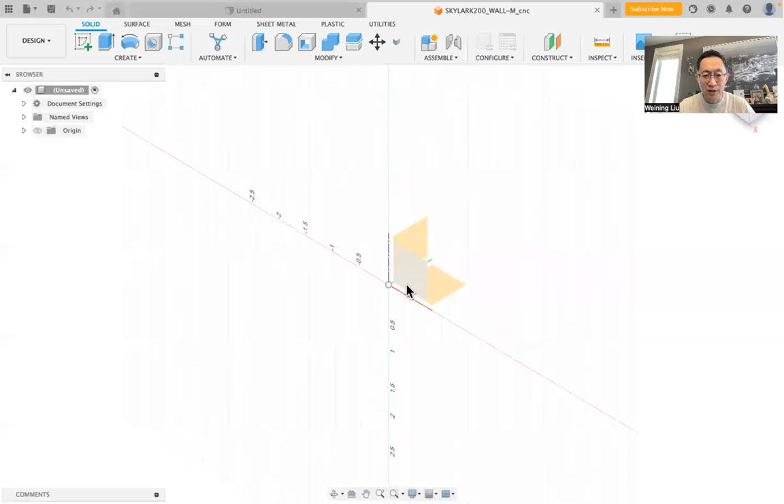So let's start from opening a file. I'm going to open a Skylark 200 wall CNC DXF file. Once I have this file open, we should see a couple of sketches. So here, if I expand this, there are multiple sketches, and the objective is to turn this into a 3D design.

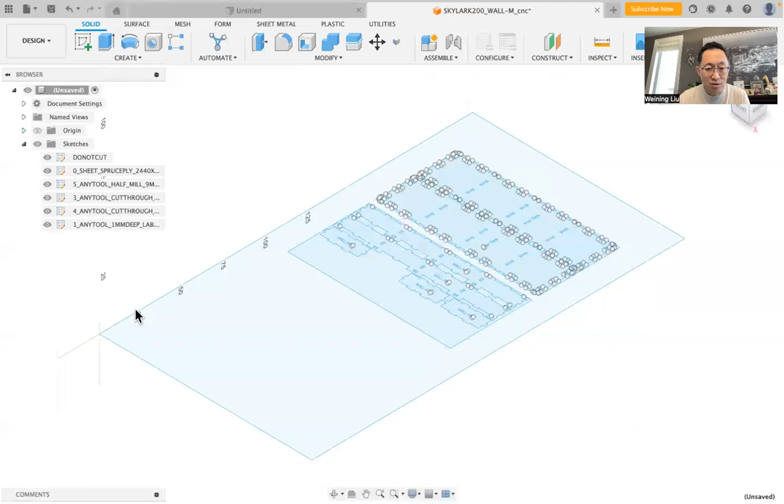Before I do that, there are a couple of things that are going to be useful. One is to capture the design history. So we have this nice design history here. And secondly, I want to change my units into millimeters. Okay. All right. So we're going to do this by order. So let's start from 0, and we hide everything else.

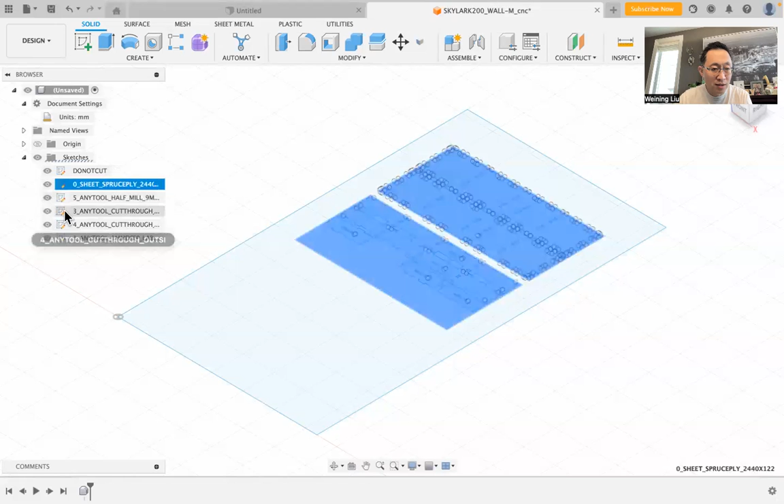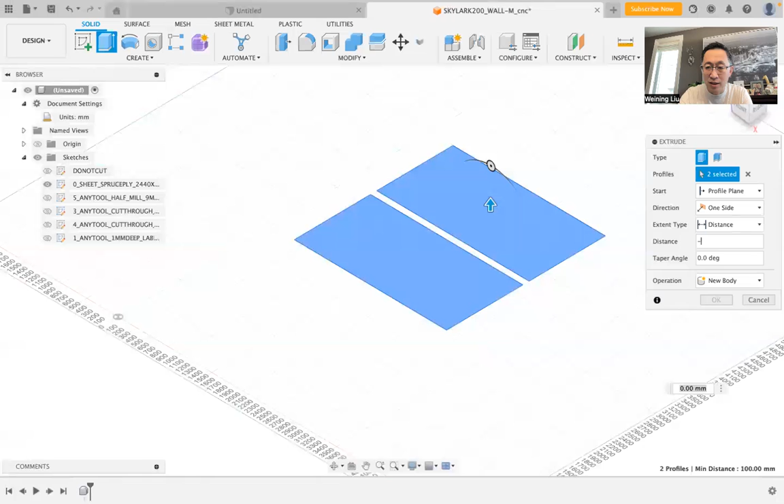Then we select these two. Then we hit the letter E on the keyboard. And you see two profiles selected and the distance. The distance here should be the thickness of your board, assuming you have an 18 millimeter plywood board. The trick here is to use -18 and create a new body from here.

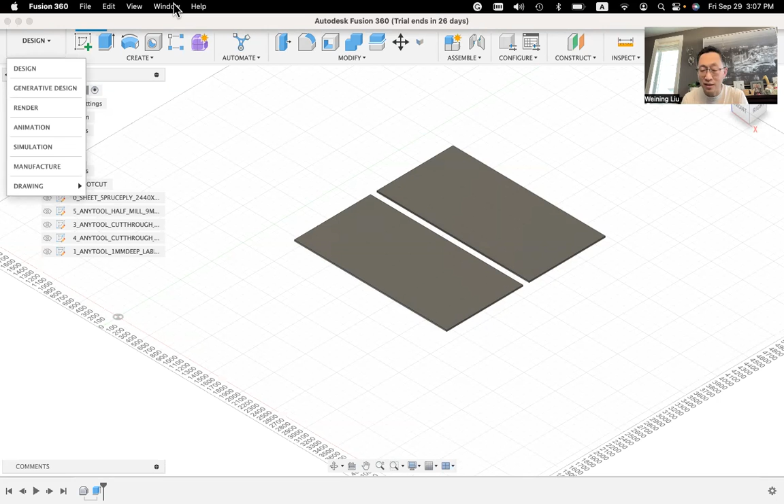The reason for -18 is if you were to do 18, by the time you switch to manufacture, you notice that you actually have to cut the board from the reverse side, like you see the two tabs from here. So by setting it to -18, it will resolve the problem. Okay, so we're done with 0. Next, we need to go to 1.

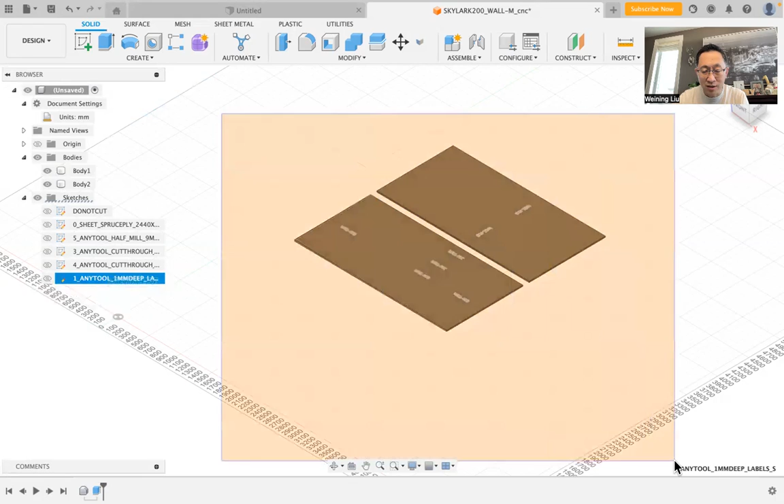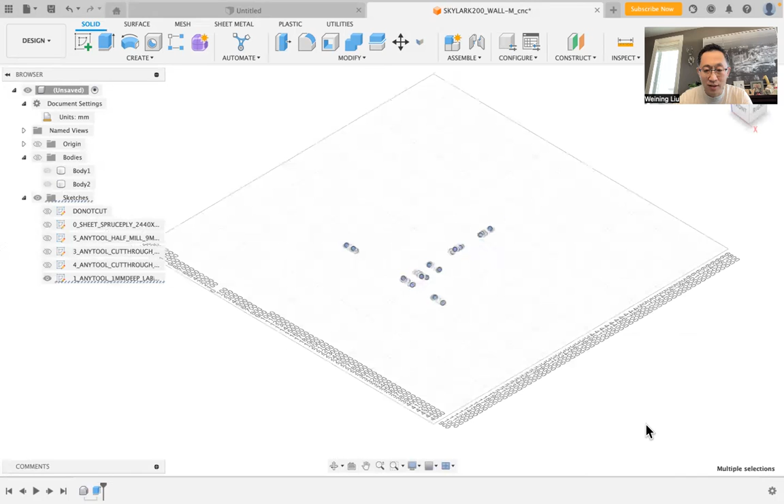So here is the second part of the details, and something to be careful with: this is 1 millimeter deep labels. So if I were to select this way, actually the two bodies will be selected as well. And then when you extrude, it will complain with some errors. So what you need to do is hide the bodies first, then select this sketch 1. And then you basically select them all. Then you unhide the bodies.

Then you hit the letter E. So here you see certain profiles selected. And this is -1, and it's a cut, and it's cut on body 1, 2. Okay. So you zoom in, you can see there's some cuts here. Okay, so done with 1. There's no 2. So we go to number 3.

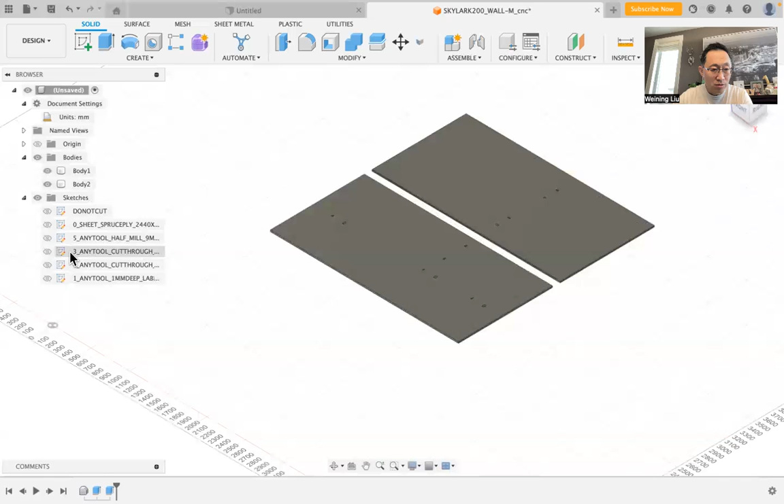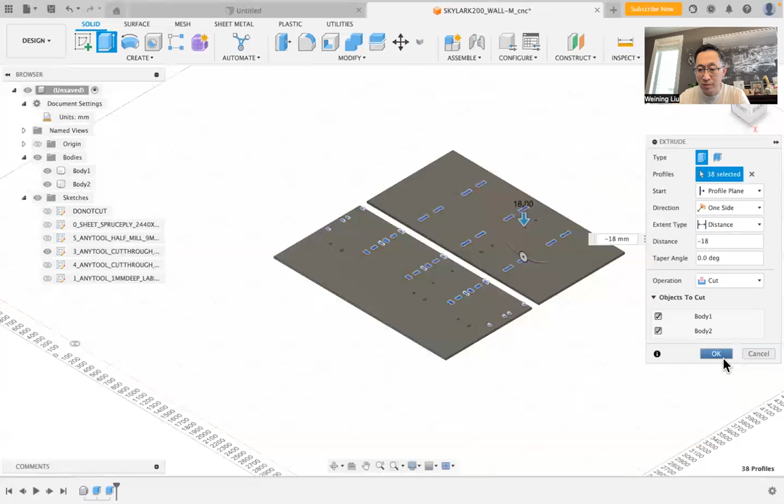So number 3 are these slots, right? Number 3 is cut through inside. Again, we need to hide the bodies first. Then we have 3. Then we select them all. And we unhide the bodies, then do E. And this is cut through. Cut through means you have to do -18 as well. And this is body 1, 2. Okay. If we zoom in, we can see, yeah, these are cut-through slots.

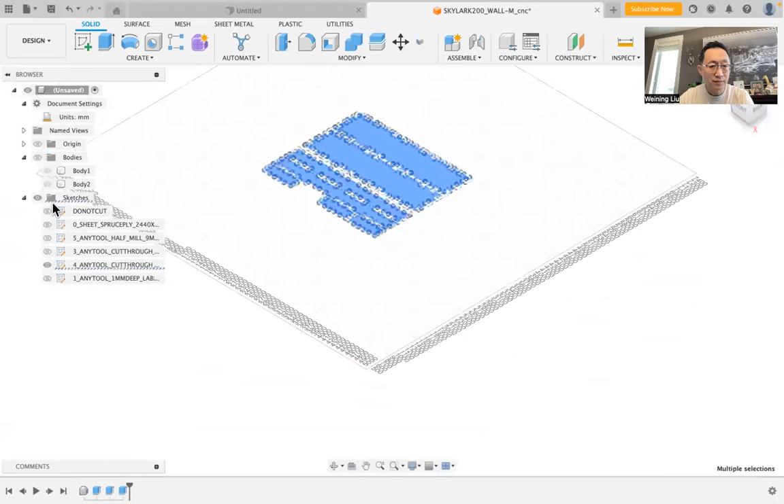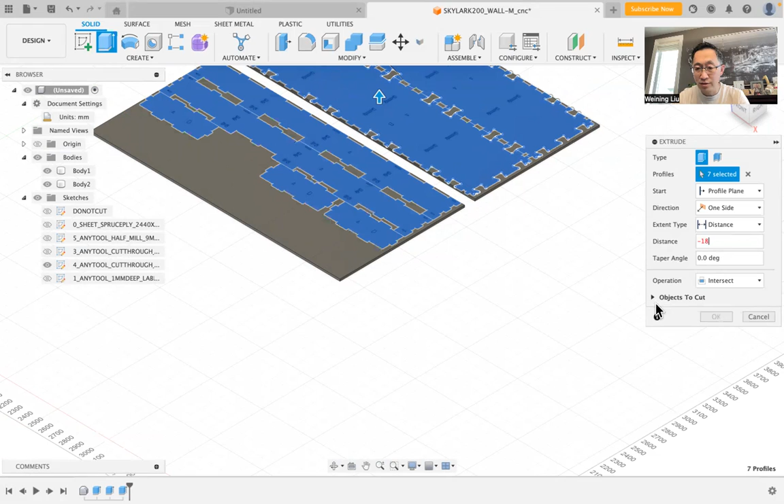Okay. So the next one is number 4. Unhide. Number 4. Hide the bodies. Select everything. Unhide the bodies. The letter E. And here we basically need to cut out the new bodies. So the operation here should be intersect. And the distance is also -18. Okay. Looks like that's going to cut some new bodies here. So let's do OK.

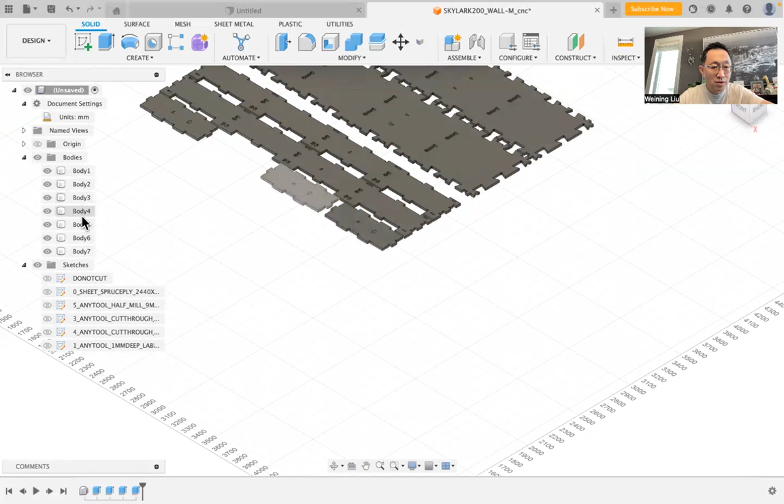So you can see here that we now have a total of 7 bodies. Okay, so this is good, and this will be cut out from the manufacture workspace. So I think we've done 4. The last one is number 5.

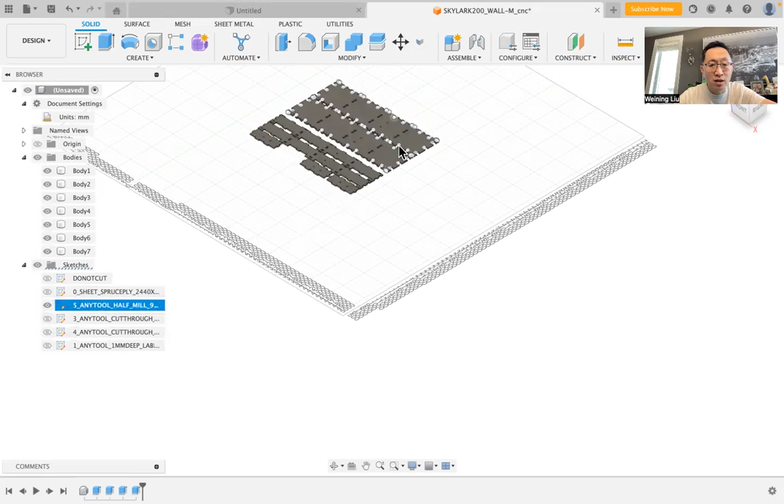Number 5 are some pockets, 9mm inside pockets. So these are the pockets. What we need to do here is hide the bodies first. 5 selected. Select them all. Unhide the bodies. Hit letter E. Then 58 profiles selected. Then we do -9mm. And this will cut out on 2 bodies only. Okay. That's it. That's completed the design section.

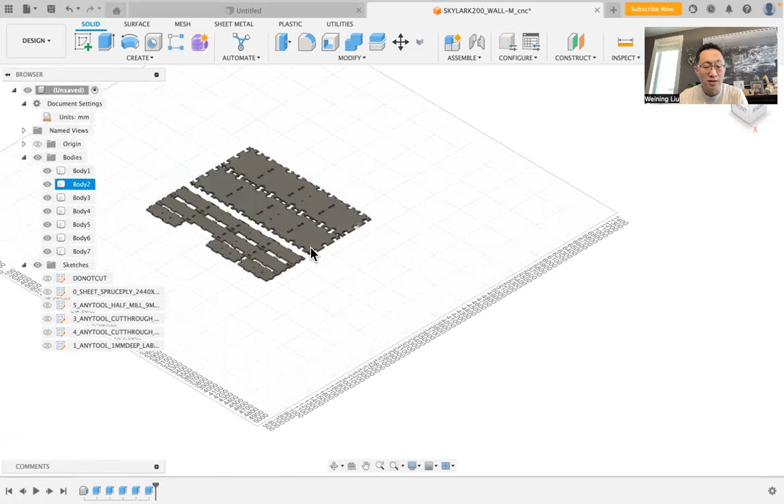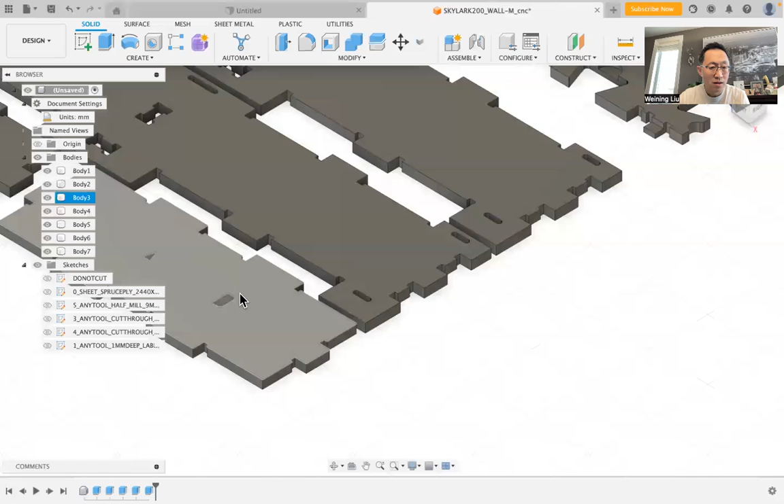If you zoom in here, you should see the outlines. You should see pockets. You should see 7 new bodies. There should be some letters, labels cut out here as well, but it's not rendered nicely. That's about it. So next you can start to move to the manufacture space.